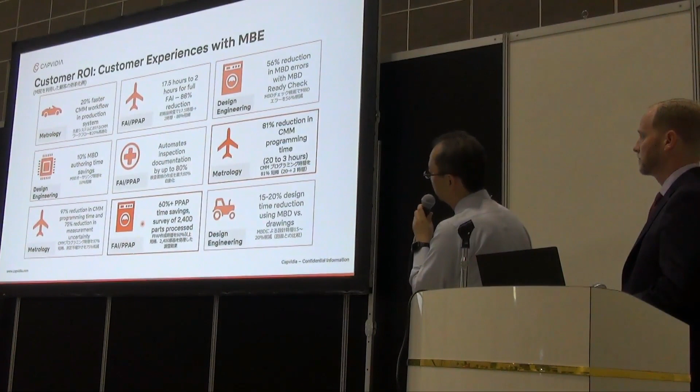So I'll start with a short case study that was carried out with a user of ours, Raytheon Technologies, which is an aerospace and defense company in the United States. And so what this study was about is they wanted to prove to their management that there was a good use of model-based definition and a good use of QIF for their metrology department. They wanted to show that they could use MBD in their CMMs and that it's faster, that it's more efficient

than manually programming CMMs. So what they did is they picked a part for a pilot, and this part was one of the most complicated parts that they could find because they really wanted to put it to a complete test. They already had information about how much time they had spent to manually program the CMM for that part. They knew that it was a 16-hour job. They had spent 16 hours programming that specific part.

And so they went through this pilot, loading QIF data that was generated from, in their case, Creo Parametric, generating QIF data, running it through CMM software, and they went through this test to see how long it would take them. In this pilot, it took them 3 hours to generate the CMM program. So this was calculated as an 81% reduction in time for this task of CMM program generation.

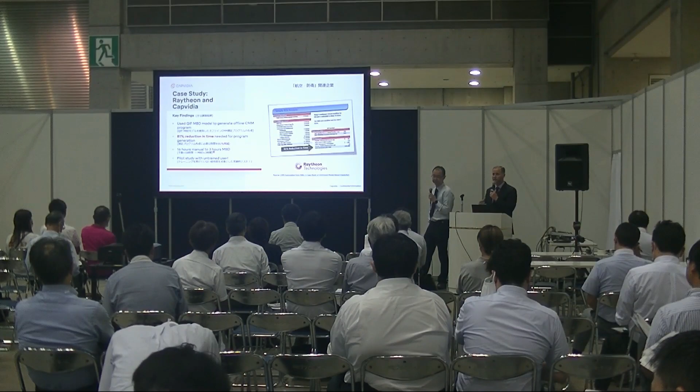And so this was a huge success for them. They were able to present this to their management, and it really helped to generate a lot of enthusiasm within the company for model-based definition approaches.

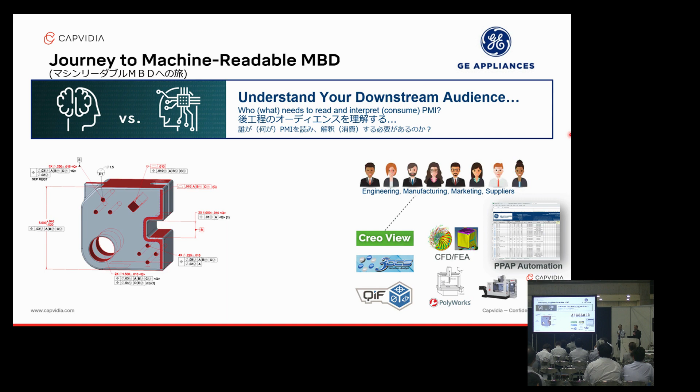So I'll get into another use case here. This is with a different user of ours in a different industry. This is GE Appliances, which is a large appliance manufacturer in the US. And this case study is about their experience in terms of using model-based definition for their PPAP report generation, so for their inspection documentation, both internally and for their supply chain.

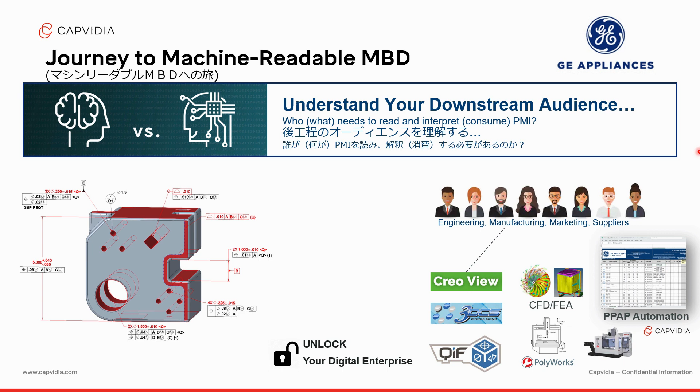GE Appliances is an interesting company because 100% of their design data is MBD. They do not do any drawings at all. They have transitioned entirely to MBD, and it's been a very, very big success for them. But there were some challenges along the way, and they have learned a lot since then, and CAPVIDIA has helped them providing tools with that MBD journey.

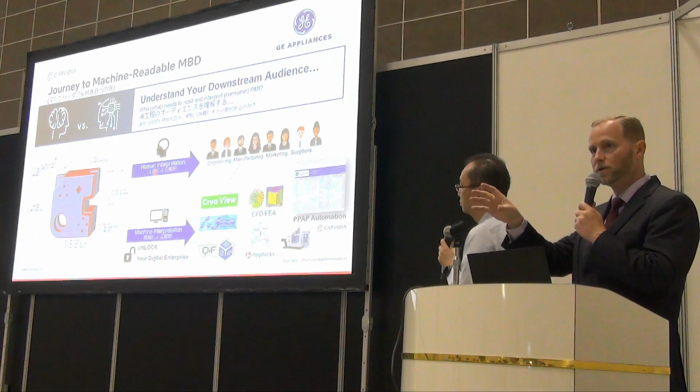A big lesson learned that they had was understanding the difference between machine interpretation and human interpretation for PMI. So what does that mean? If you have a CAD model and you're rotating it, a human can look at it with his eyes and see what's there. That's one mode of interpreting the PMI. The other mode, though, is taking that file and loading it in another software tool, for example, a CMM software tool, and seeing if the CMM software tool can read everything that's there. These are very different things.

You might have a model that is very, very human readable. Annotations are laid out very nicely, but the semantics of the PMI might be broken so that the machine is not able to read this. And this was a big struggle for them because the human readable side of things was important for their team, and that's kind of an easier goal to accomplish with PMI, creating good human readable PMI.

But the challenge that they had was the machine readable PMI. They encountered many situations where the PMI was not able to be consumed by some of the software tools that they were using, like the CAPVIDIA software, like Polyworks, which is something that they use a lot, some of their tolerance analysis software, etc.

And so this was something that we set out with GE Appliances to help them solve.

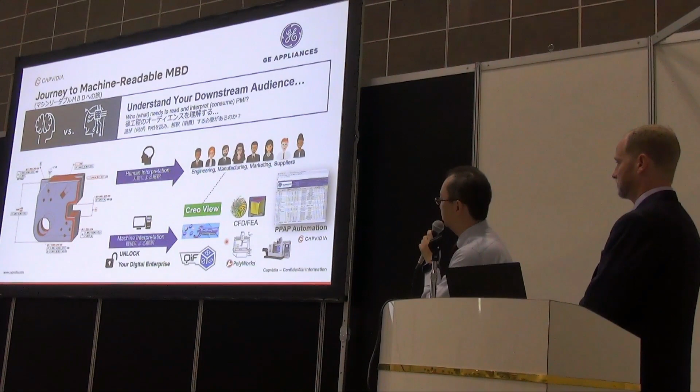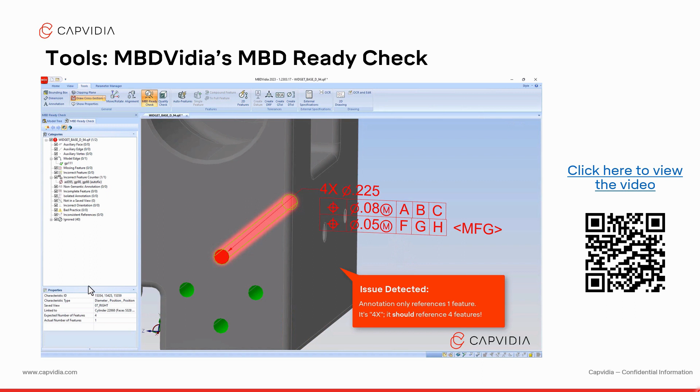So the tool that we provided to GE Appliances to help them with this goal of creating good machine-readable PMI to enable their software applications is part of our MBDVidia technology, and it's called MBD Ready Check. What MBD Ready Check will do is it will analyze the PMI on a model to be able to tell what issues there are in terms of machine readability.

So this video here will have a couple examples, very basic examples that are classic examples.

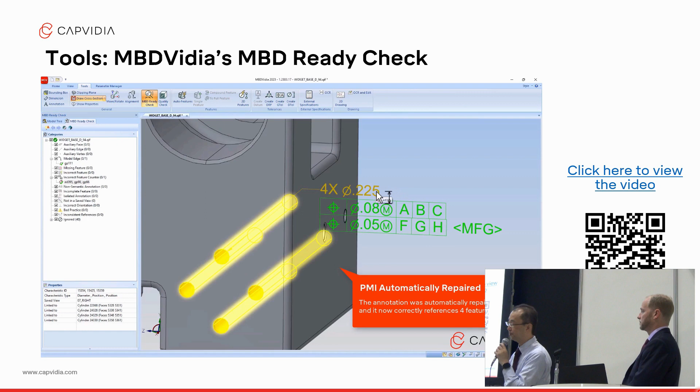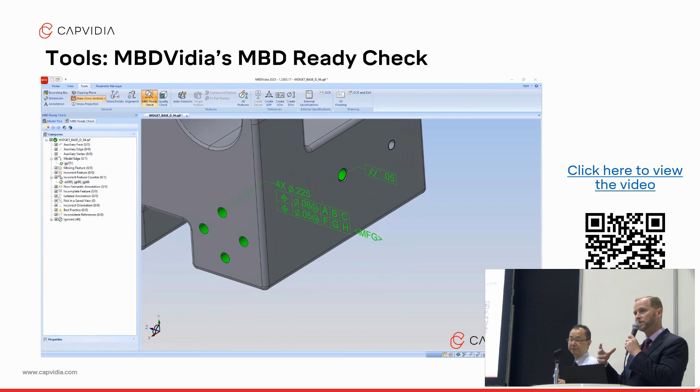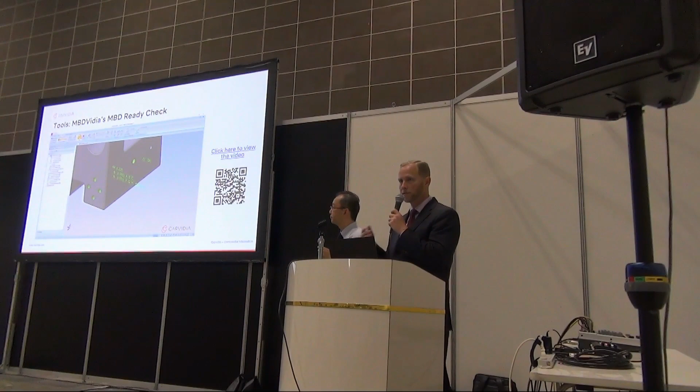So this tool was a very big helper for GE Appliances on their MBD journey because it enabled their downstream software tools to be able to read the model-based definition data also. And what we have seen in terms of some of the metrics of this improvement is that they're able to generate all of their PPAP documentation using MBD now.

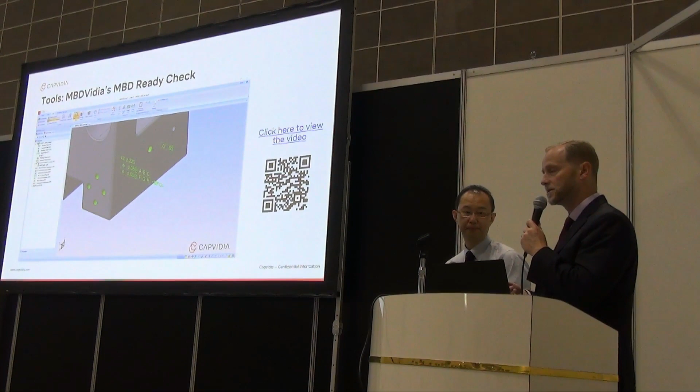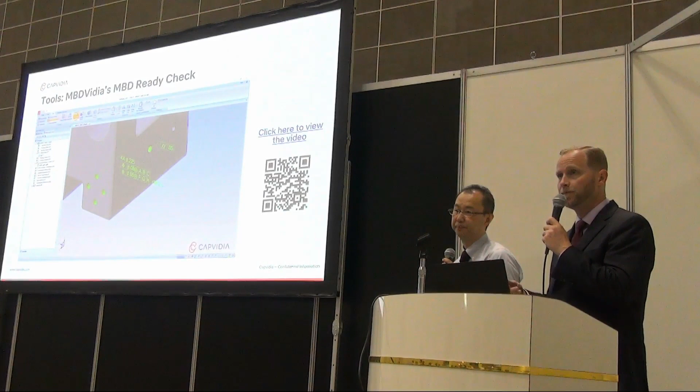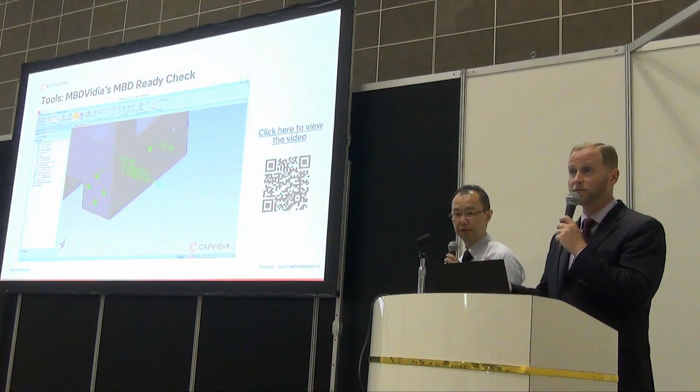The improvement that they've seen using model-based definition to generate their PPAP documents over the manual process is a 60% improvement of time, and that's on more than 2,000 PPAPs that they run through every year. And what we saw with the MBD Ready Check tool is that once they implemented this, they saw a very, very large reduction of errors in their PPAP process down to very close to 0 errors, which was a great benefit to them in terms of automating their PPAP process.

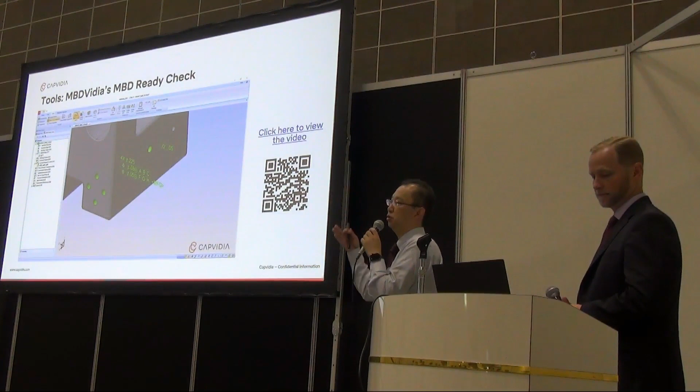And with that, I'd like to just say a few concluding words and talk about some of the major lessons that we've learned from working with our customers on MBD implementations, and just some good points in terms of how you should best go about implementing model-based definition in your environment.

So the first point is that you should understand the downstream reuse case for MBD. In other words, the objective of creating MBD is not just to put the 3D annotations on the model for humans to view it. You have to remember that there's software downstream that will be able to use it. And so it's important to understand what are the software tools that will consume the MBD that I'm creating. In that way, you can make sure that you're optimizing your PMI, your 3D annotations, so that they're very well supported in that downstream software.